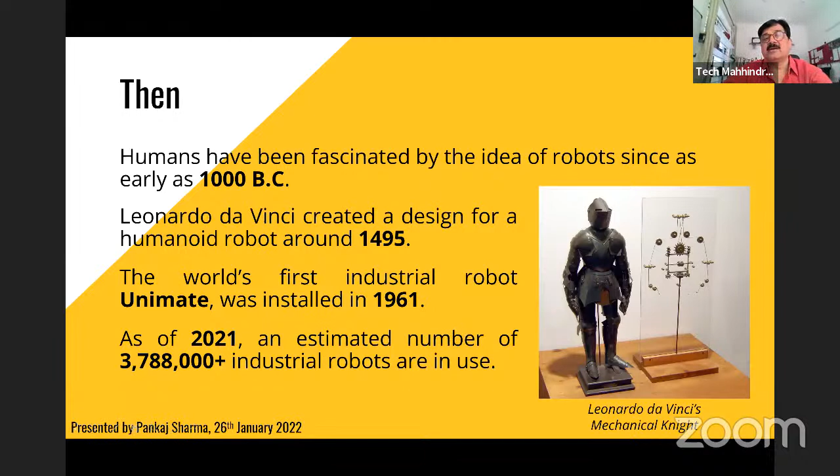But if you look at the first industrial robot, it was called Unimate, and that was installed way back in 1961. If you look at today, in 2021, it is estimated that there are almost 4 million kinds of industrial robots available—3,788 thousand as of now. Typically these robots are now placed in industries, and they are actually producing, actually generating some value out of the creation which has been done.

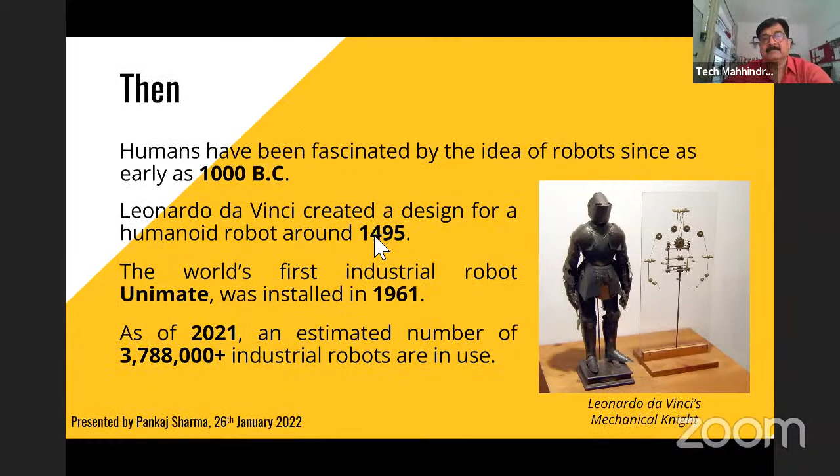So the question is, why robots? What lures you into robots? There would be many of these participants who would have built some robots, many would have seen robots, many would be intrigued and done something on that, but have not actually implemented something. This forum is a good forum where I can talk about it, tell you what can be done with these robots and what you can build upon.

So for that, you need to understand what a robot is. You need to understand what qualifies - if I build a small device like a scooter, does it qualify to be called a robot? No. A robot essentially is a machine which can be programmed, number one. So this is the primary criteria. The object or the device should be programmable,

and it should be able to carry a series of actions. There has to be a sequential series of actions which can take place, and generally these are complex actions. Then it constitutes a robot. If I cannot program it - for example a scooter - I don't program it, I just use a scooter as an automatic or maybe a mechanical device. There's no programming as such. Number two, I cannot tell it to actually do a series of events, that okay, go to the market, fetch me this product or thing. That is not possible. When that is not possible, then it does not qualify to be called a robot.

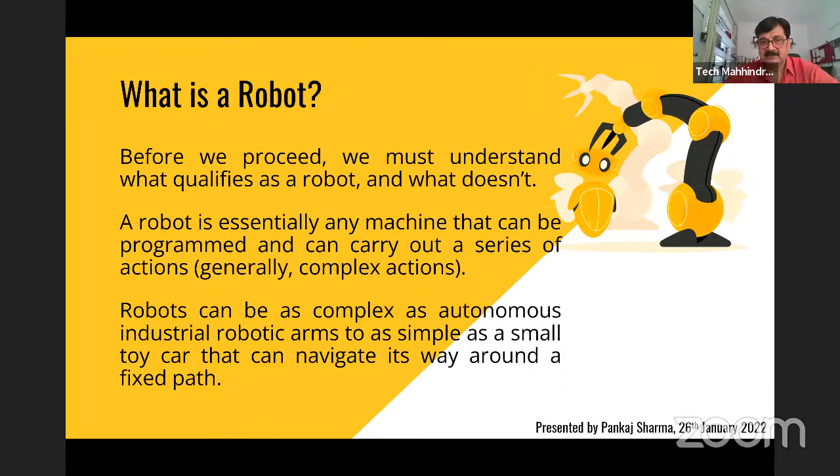Now the question is, why do we want to use robots? This has been an age-old question, and there have been philosophical and various kinds of thought processes, and people have given a lot of philosophies and theories behind this. But the reasons are based on the use cases.

Multiple industries, multiple facets, multiple domains, they need different kinds of robots. If you go to the industrial side, on the manufacturing side, you need robotic arms to manufacture, to probably weld something, to inspect something, to clip something, to screw something, place something, pick, hold, sort. These would be industrial kinds of things.

On the other side, you could have robots which are humanoid in shape and which are running and fighting people - then it becomes a defense segment where defense would need these robots, for n number of reasons. Likewise, you would have robots which work specifically for the medical industry, for surgeries, for giving assistance to doctors, for picking and carrying medicines and other services to patients as an assistant or maybe a nursing staff. So that would be different kinds of robots.

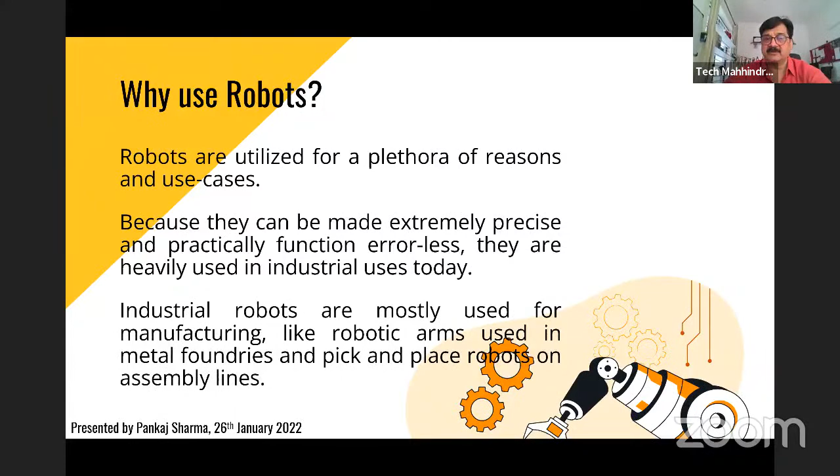Based on the usage, you have almost 16 different kinds of robots available in the market. And why do you use them? You principally use them for applications where you need some kind of physical movement, as I said earlier. The most commonly used mobile robots today are drones, and these are actually robots because A, they have locomotion, B, they can be programmed, and they can have some kind of even an intelligence in them.

So drones are now being actively used in military, in defense, in surveillance, in exploration. You would be surprised - one of the major usages of drones nowadays, apart from GIS and other surveys, is being done by the insurance industry. They are using drones very actively to look at assets, to look at physical locations where a surveyor cannot go, do some kind of an operation, get back the feedback, and then the insurance can be processed. A very unique case.

Similarly, for oil exploration, for going out into the deep seas, figuring out - now there are drones which are available, which can be submerged in water as well, and they can do surveillance both in air as well as in water.

So you have amphibian drones available which do both these cases. They fly on, they go back, then dive inside the sea, propel around, do some kind of recce, and come back with a lot of data available. This is happening, and this is why robots are very, very important.

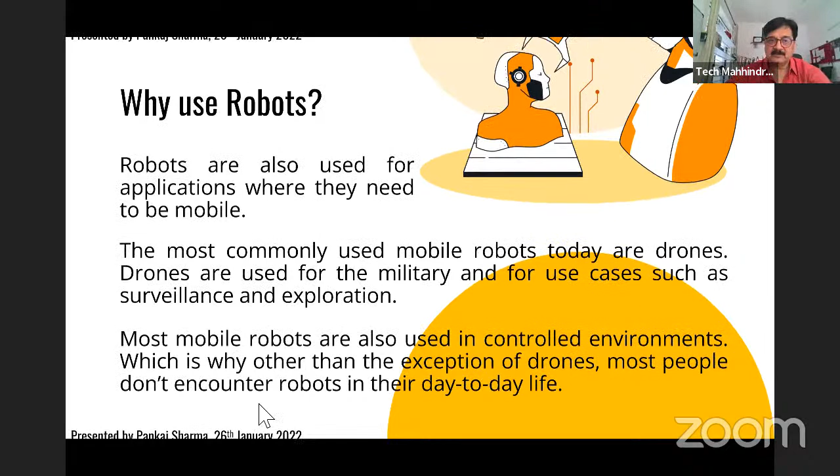Robots are also being used for educational purposes. Not only do you have robotic kits which can help students learn, but robots can themselves be teachers. There have been cases, for example at Boston University, where robots have taken live classes and done a phenomenal job, and the students actually liked it. So likewise, they can be teachers, used for educational purposes, and do a lot of stuff for students, including explorations.

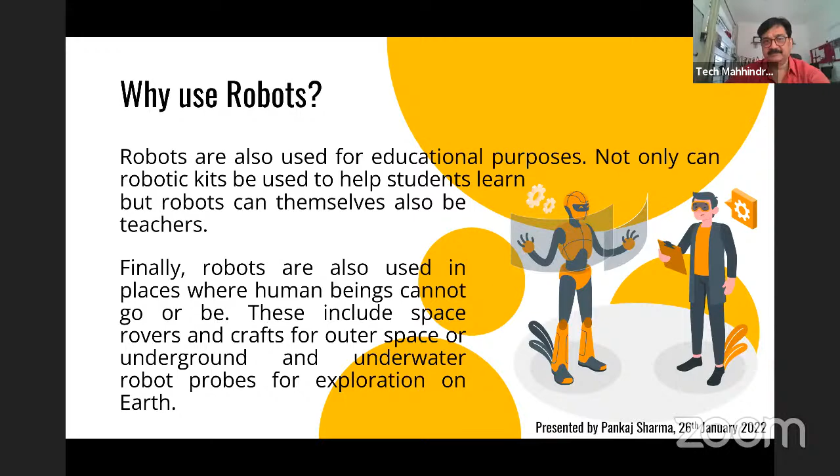So this was back then, and now what is happening? Robots are becoming an integral part of society. Today, from domestic cleaning to industrial robots, they're everywhere. You would not believe it, but the robotic penetration is much faster than you can think of. In Mumbai alone, it's estimated there are about 15,000 to 50,000 different use cases of robots in use.

The speed at which adoption is happening is mind-boggling. It's happening at almost a 36% CAGR—every year robots increase by 36 percent. That's phenomenal. You might see in coming times complete platoons of almost 100 to 300 robotic fighters, or soldiers, which would actually carry out war scenarios or salvage operations for defense purposes.

That's very, very near. The robots you see in industry have been taken up very effectively, and they are the most sought after right now because they make the mundane and repetitive tasks of industry very easy, and the risk factor is reduced. India as of now is seeing a surge of robotic arms being deployed in all industries. Industry 4.0 is all about robots being deployed and processes being automated on the industrial side.

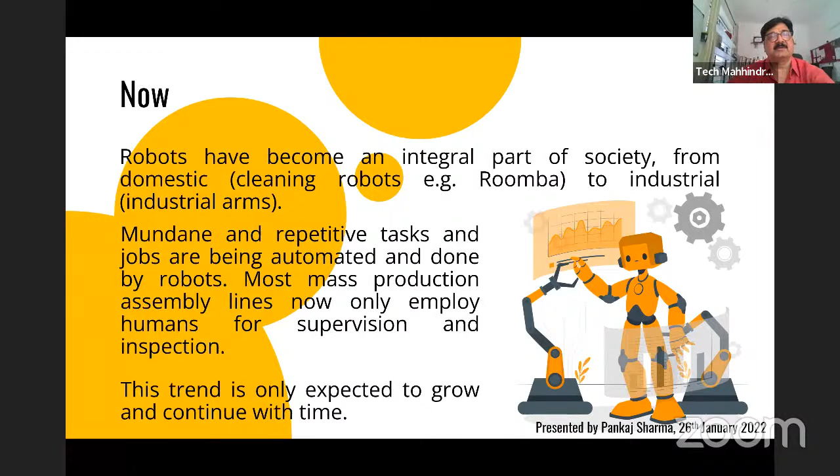And this is growing at a phenomenal pace, as I said, 36% CAGR, which is actually phenomenal. So now the question comes up, how do you get into robotics? That's something I'll take more time on.

With the popularity of the internet and increasing accessibility of knowledge, you get so many webinars and platforms like Udemy and Coursera. Every important university today is giving a lot of knowledge on robots, and that's increasing and accessible to you. You can take lectures there.

You can learn about robotic operating systems, and about making robots. You have things like Thingiverse where you can do actual designing as well. You would be able to create replicas, build those replicas, present it to people, and make your own use cases, working on them.

The three important aspects in primary robotics are: one, the mechanical structure. You should have some skills on the mechanical side, because you would learn how to design a robot with respect to the physical asset - how many arms, what degrees of freedom, what should move, how much it should move, whether it traverses laterally or circularly, whether it's locomotion or a stationary thing. All these things require a good understanding of mechanical engineering.

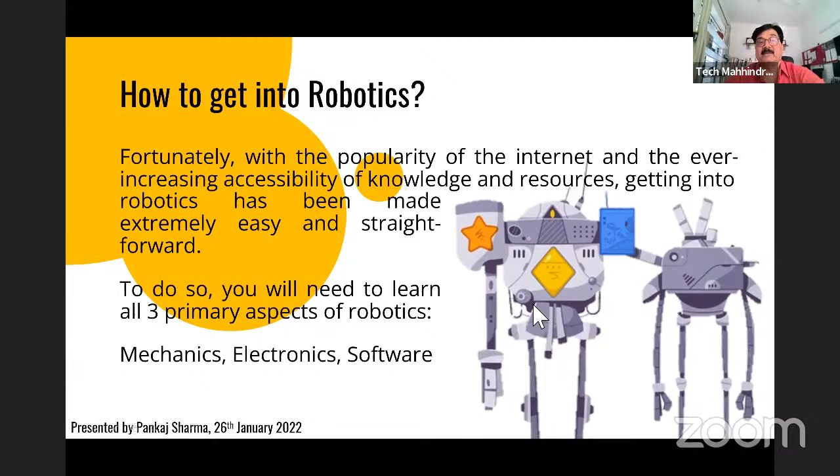So first, let us talk. I talked about the three things, but if you look at the mechanical part of it, it is typically related to how a robot's mechanics would work. So depending on how big the robot is, how it looks, what it is made up of, material science would also come partially into it.

This also requires a lot of CAD designing and prototyping. I would want all mechanical engineers, if you have not done that kind of skill, to take that skill now. Given the 3D printers accessible to everyone, and if not, you can get those 3D things printed in the market because job work is available. So if you can use your CAD skills to design robots, that's in itself a huge potential area.

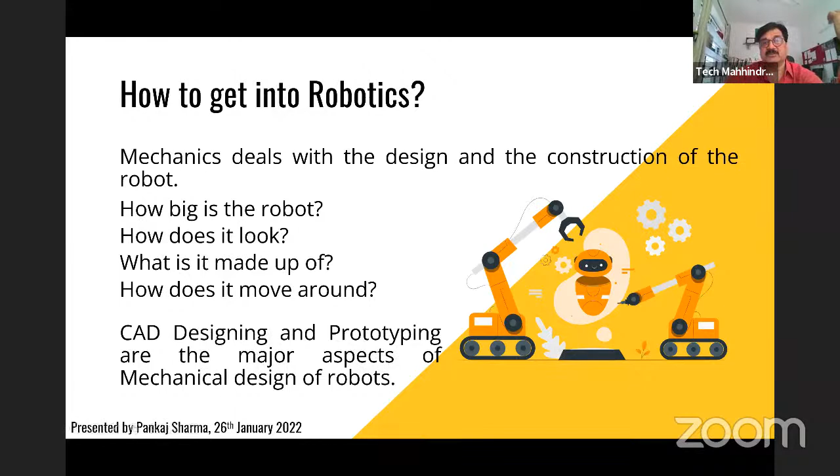People are looking for engineers who can design, ingeniously, different kinds of robots. Many of you would have seen robots from Boston Dynamics - the walking robots, quadrupeds, bipeds, humanoids. Boston Dynamics is one of the leaders in the world. Every day, people are coming up with new inventions and ideas, and they need a structure to be given to them. That's where the mechanics come into part, and that's where you see a lot of potential for yourself. It is not necessary that you build the entire robot, but even the part of building it physically requires a lot of knowledge which has to be gained.

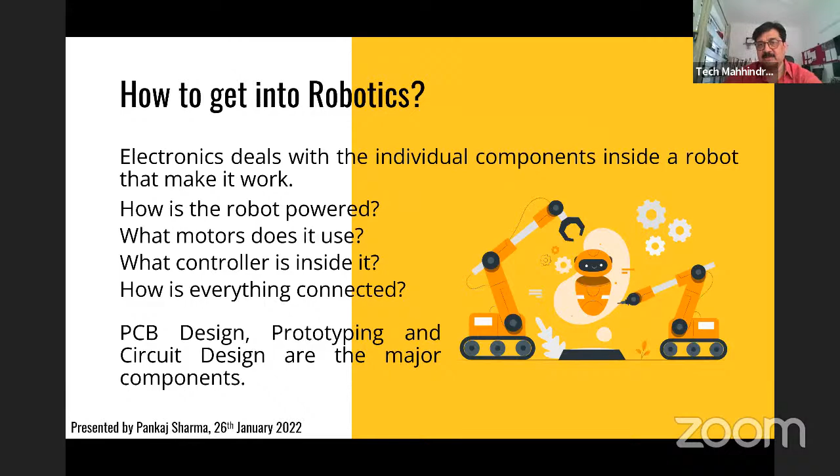The second aspect is electronics: how the motors have to be controlled, what controller to use, which kind of embedded controller, and which kind of power supply has to be designed. Then you get into PCB designing, prototyping, circuit design, component connecting, signal conditioning, and modules. All these components allow you to sense the environment and execute motions, and they constitute the electronic part of robotics. These are the skills you need for robot making.

Third is the software part. Typically Python and C++ are the primary languages which come into play, but that's not limited—different platforms also have various versions of native C and other kinds of languages. Those can come into play and give you a good idea of this.

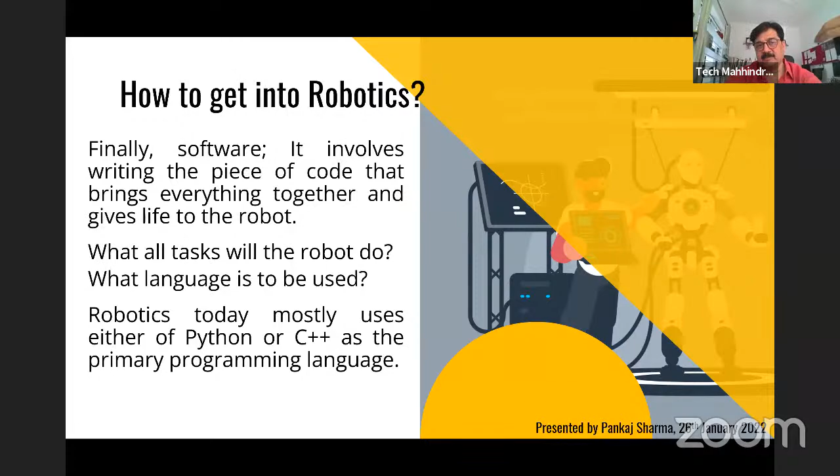This should also be combined with skills in web technologies, because much of the control of a robot is now done over the internet itself. So IoT becomes a primary criteria for robotics as well.

So how do you start? The best way is to start with a simple kit. You can find these kinds of kits on Amazon.in, or go to robu.in—these robots are available for as low as 3,000 to 5,000 rupees. They give you a much better perspective of exploring and a hands-on idea of what can move, how it can be moved, and how to control it.

Then you have Udemy, Coursera, YouTube, and Thingiverse. All these give you a lot of projects which people have been doing, and open source ideas on what you can do with this. This can get you going very fast, and you would seriously love to tinker around with these things.

Once you have these kits and work with them once or twice, you can try to modify them. Can I rotate it at a given place? Can I control how much motion happens after a particular action or event happens? So the moment I go in front of a wall, 20 centimeters from it, I should turn left, right? These ideas can actually help you start going into the robotics domain.

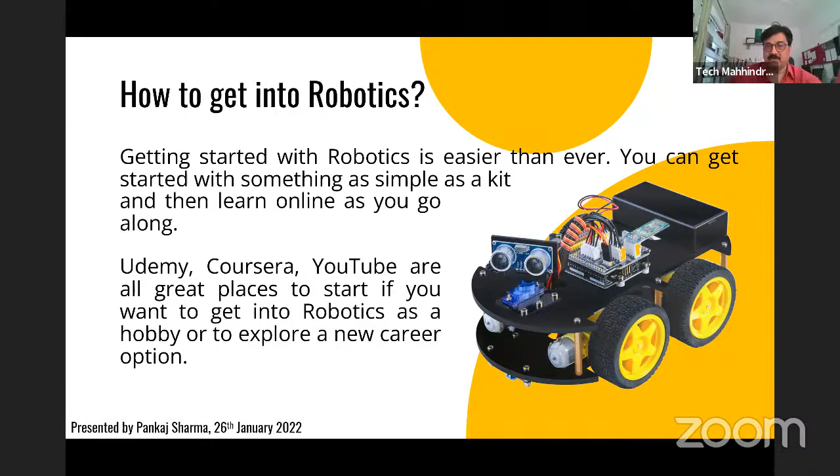So buy these kits and get onto courses that give you a good idea of the Robot Operating System as well. ROS takes away a lot of the low-level functionality you would typically be programming, and that can give your robot a much more autonomous kind of control.

What happens in the future? If you look ahead, robots are going to become much, much smarter. People are already building robots—IBM recently built one with almost 16 motors attached to a silicone layer that would mimic a complete human face, with skin moving to give expressions of smile, anger, and despair, just like a human face.

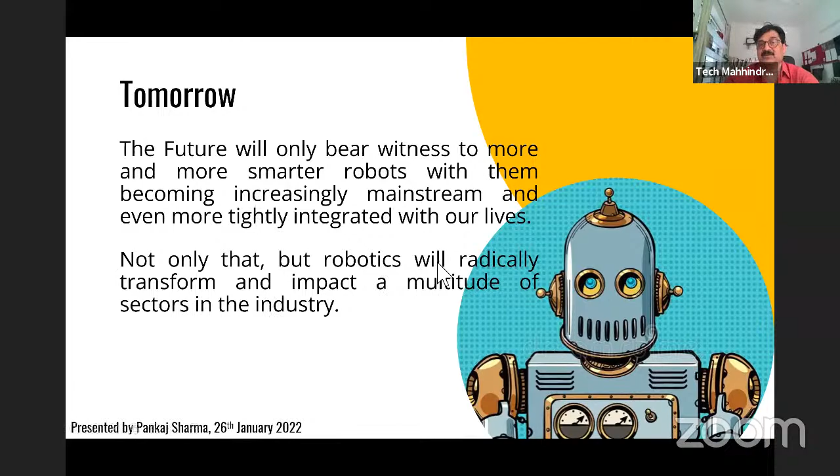They even have cameras hidden behind optical lenses, giving complete vision like a human eye, with eyelids blinking now and then, and expressions changing based on accent—even the accent itself changes. All these things are happening, and humanoids may be the way forward. It depends on how industry progresses and how the needs arise.

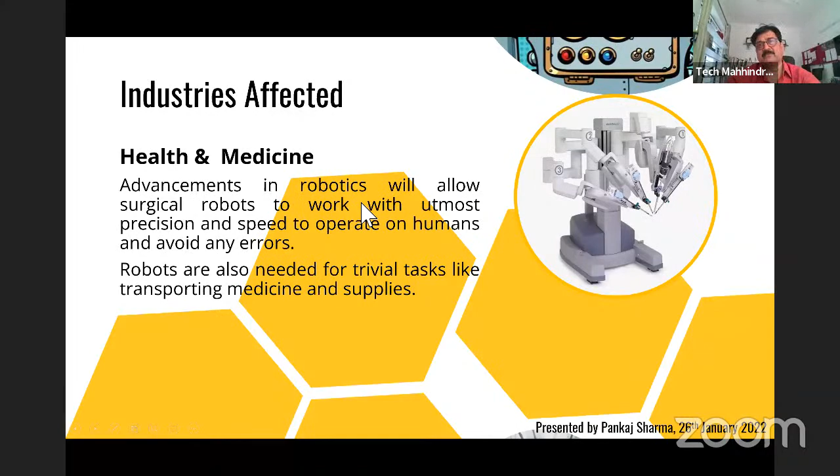So what are the industries which are affected? Health and medicine is becoming one of the most important service areas which needs robots. Can you do precision surgery? Can you do remote surgery? Can you take up the trivial task of transporting? All these things are much needed. And if robots are deployed which can give a qualitative delivery on these things, it can save many, many lives. A very important domain which needs much of the robotic aspects.

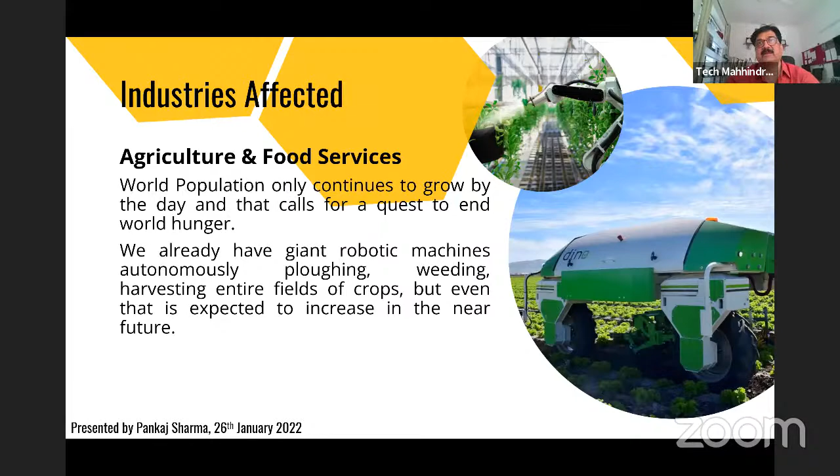Then agriculture, again a huge area. Agriculture requires a lot of human care, and a lot of manual effort goes in. If your farm is in acres, think of the effort the farmer has to do to maintain that farm. If we could give robots that whole structure, they could do it at a much lower labor cost, and that could probably have a lot of benefits also in accuracy. So again, agriculture, food industry, hospitality industry, all these have a lot of use cases.

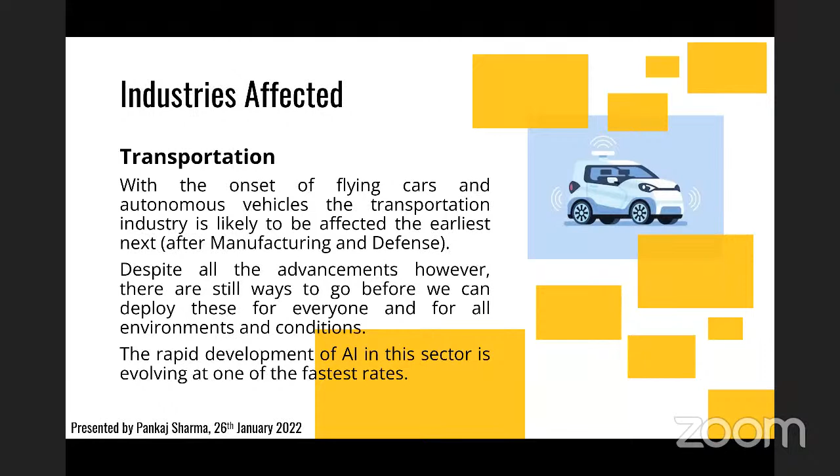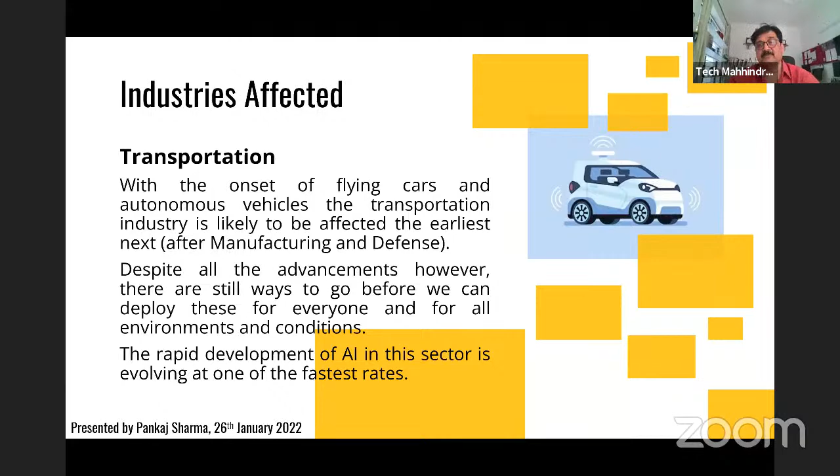Transportation, another major area, and the whole world is now looking at, given the success of Tesla autonomous driving, this is now something which is phenomenally good. So you would have cars which would be autonomous, even flying cars are coming up, even drones are available. All these would need a lot of transportation which is completely autonomous or robotic in their behavior. How to program them, how to build them, how to maintain them, how to service them. All these would require a lot of manpower in these domains, which you have to skill upon.

Even the defense sector. How do you do recce for other areas? How do you do surveillance for military? How can you have a swarm which can attack and control or do some kind of military activity? All requires robotic operations. The best drones, the Heron drones, completely autonomous, and they are typical UAVs which are completely autonomous. These are elements which have complete robotic systems built into them.

Israel right now is working on a swarm of Heron drones. That would typically be almost like a swarm of about 30 drones, which would be as effective as a fleet of 20, in fact more effective than a fleet of 20 F-16s working in tandem. That kind of efficacy they are building with these automatic robot patrols.

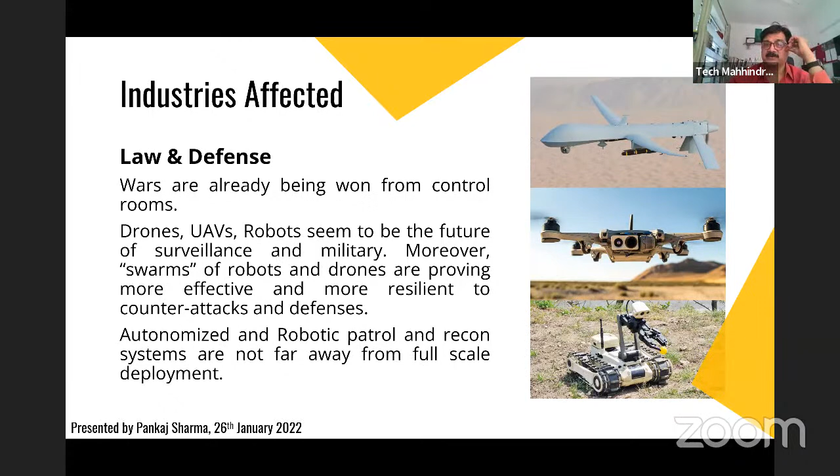Here are some of my endeavors, which would probably help you understand. I'll just play this video. This is a replica which we have recently built at Maker's Lab. This is a Wall-E replica we have created, which has almost all the elements which was there in the movie Wall-E. This is just for the fun sake of it.

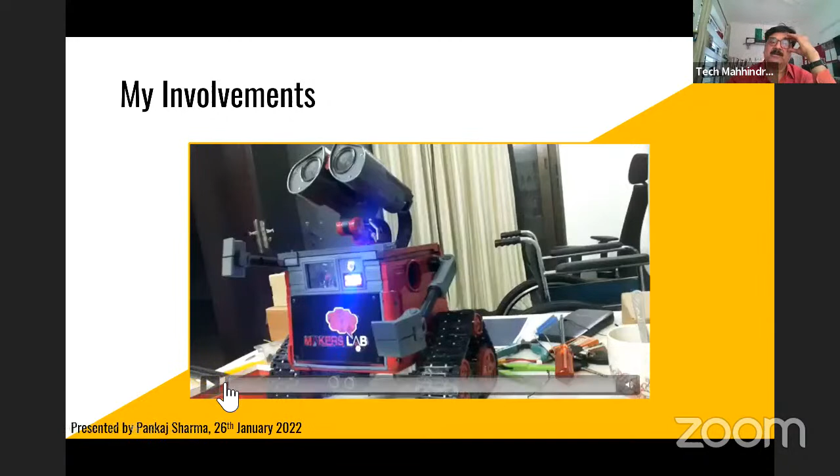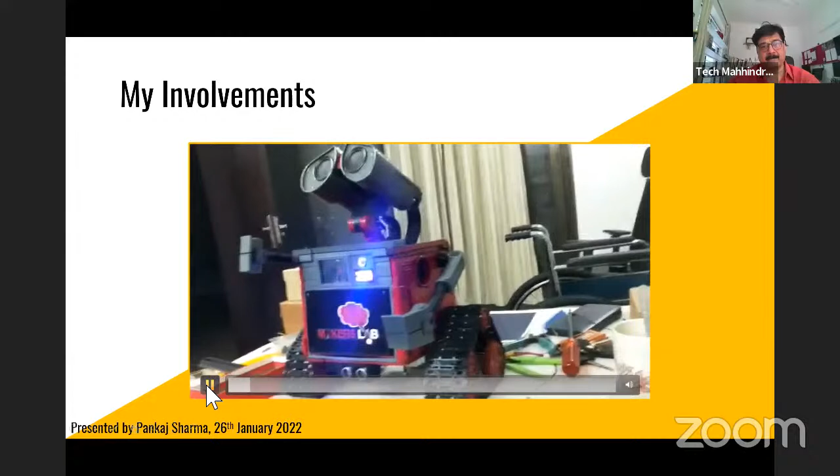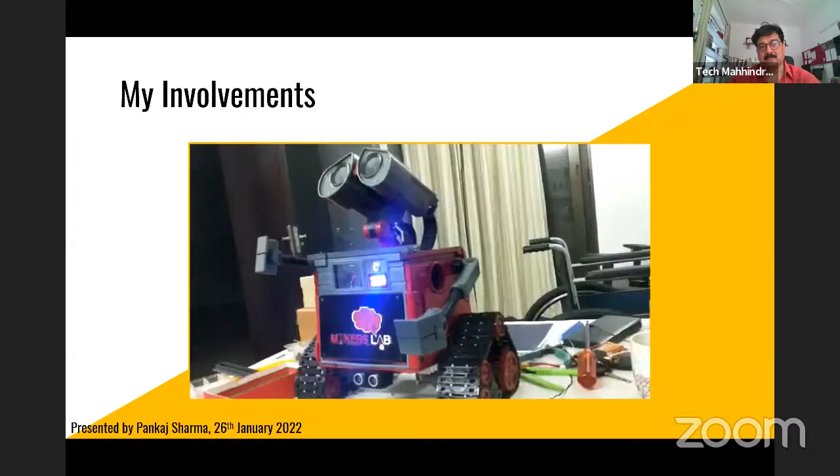But the use case that we are chasing with this is that this would have an empathy statement with our colleagues in Tech Mahindra, and this would be a wellness robot which would answer queries for people's wellness. So that's one of the use cases that we have been working upon.

Another is where we are automating wheelchairs, and this would be autonomous. This is a wheelchair which we converted from an existing wheelchair, being worked upon. The autonomous part is in progress, but again, a robotic endeavor as such.

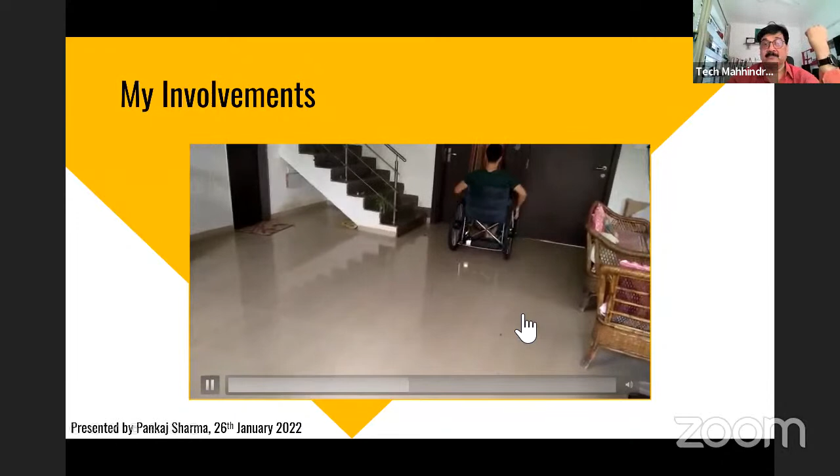Okay, so that's some of our endeavors. There have been other use cases we are chasing. We are making a robotic arm which can play chess, and that would come as a CKD kit, and we would be distributing it across India, and that would probably give a lot of students across India the ability to actually have a feel of how robots can be built and learn in the whole process. So that's a use case we are chasing.

We are also building a complete autonomous car, which would probably be ferrying people around. The idea is for community driving, and we are first converting our existing golf cart into an autonomous vehicle. Eventually, it would be a kit which would be available.